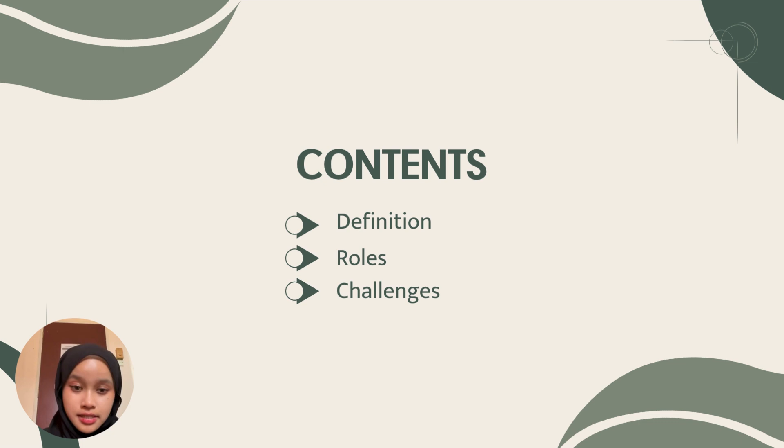My matrix number is 228158, and today I would like to present about understanding fluid properties and their impact on engineering systems. Firstly, we will go through the definition of fluid properties, then their roles in engineering, and lastly we will take a look at the challenges of managing fluid properties itself.

So what are fluid properties? Fluid properties are actually characteristics that define how fluids behave in motion and at rest. This is important to know because it is critical in designing pumps, pipelines, reactors and many more. In this presentation, I will walk through how viscosity, density, and surface tension affect engineering decisions and outcomes.

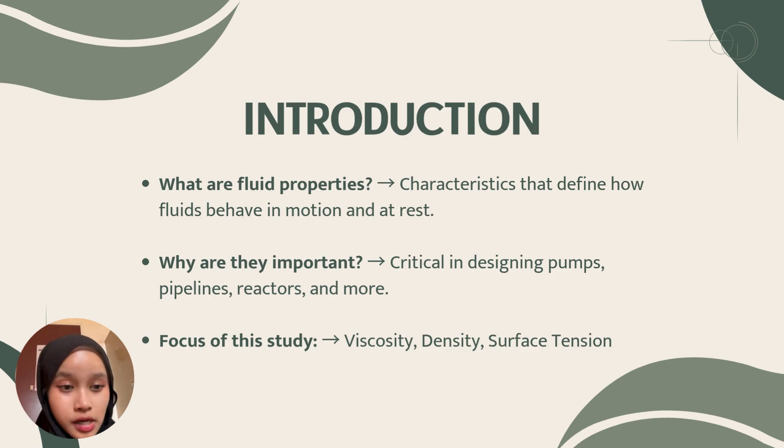Let's start with viscosity. Viscosity describes a fluid's resistance to flow. You can think of it like honey flowing more slowly than water. That's because it has a higher viscosity. In pipelines, especially when transporting heavy fluids like crude oil, high viscosity means higher energy costs, because it's harder to move, right?

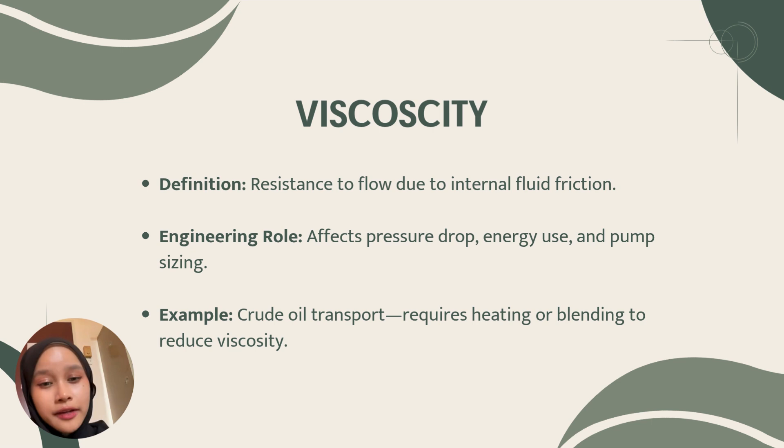So engineers reduce viscosity by heating the fluid or mixing it with lighter components to make the flow easier and more efficient. If we don't consider viscosity properly, the system may face high pressure losses or even equipment failure.

Next is density. The definition of density is mass per unit volume of a fluid. It influences how fluids settle, rise, or interact in a system. In water treatment plants, for example, clarifiers use density differences to separate solids from liquids.

Also in pipelines or storage tanks, inaccurate assumptions about density could lead to flow errors or worse, structural issues like tank lifting due to buoyant forces. That's why precise density measurements are essential for safety and performance.

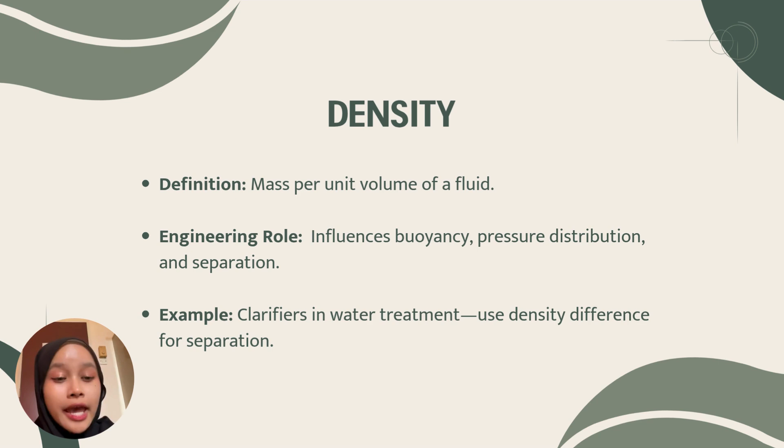Lastly, we have surface tension. Surface tension is a cohesive force at the surface of a liquid. It affects how droplets form and break apart. This is important in systems like spray dryers used in pharmaceuticals or food processing.

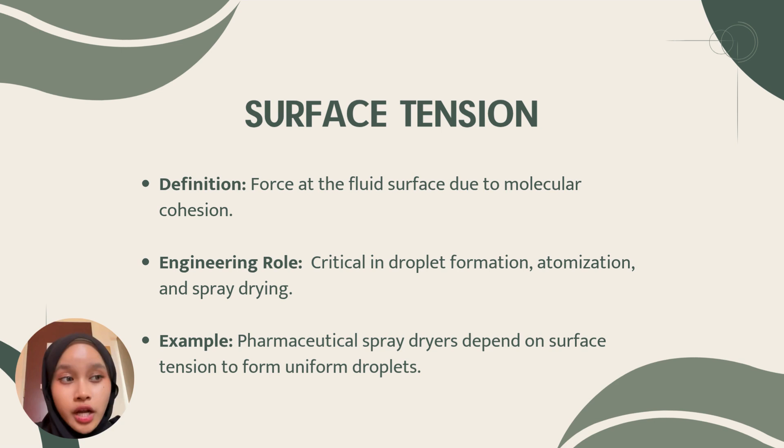If the surface tension is too high or too low, droplets may not form properly, which affects drying efficiency and product quality. Engineers must account for this property when designing nozzles or choosing process conditions.

Moving on to challenges. One of the big challenges is the trade-off in fluid behavior. Optimizing one fluid property often affects another. For example, if you heat up crude oil, it will lower the viscosity for easier flow, but it also reduces surface tension, which will affect droplet formation in spray systems.

It also happens in compressible gas flow in pipelines, where the pressure drops due to compressibility, making it harder to maintain constant flow, and this requires compressor stations and real gas models to predict behavior accurately.

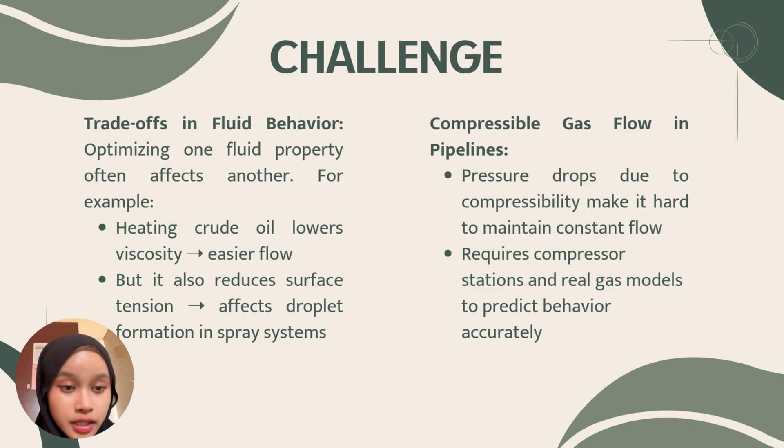Another challenge is buoyancy in storage design. For example, underground tanks may rise if the surrounding fluid is more dense than the tank itself. So engineers must account for this to prevent structural failure.

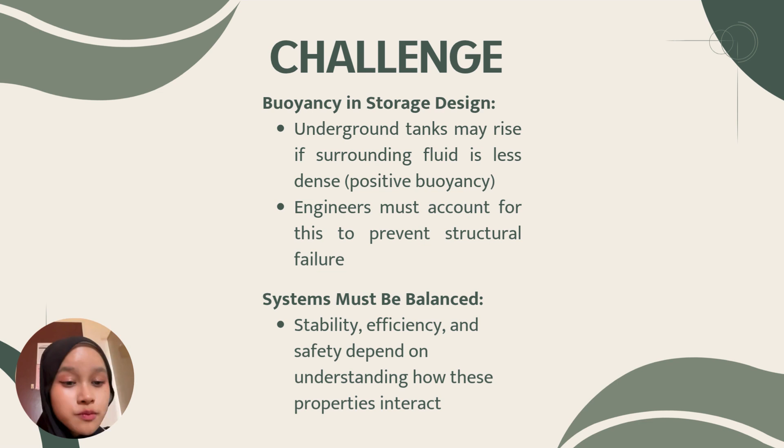So lastly, stability, efficiency, and safety depend on understanding how these properties interact. We need to master these fluid properties to become a great engineer.

So in conclusion, we need to master fluid properties to help us design energy efficient and reliable systems, and to solve real-world challenges across oil, water, chemical, and manufacturing sectors. And as engineers, we need to anticipate performance changes due to pressure, temperature, or system demands.

So when these principles are applied effectively, the safety will improve, the cost of manufacture will drop, and obviously innovation will advance.